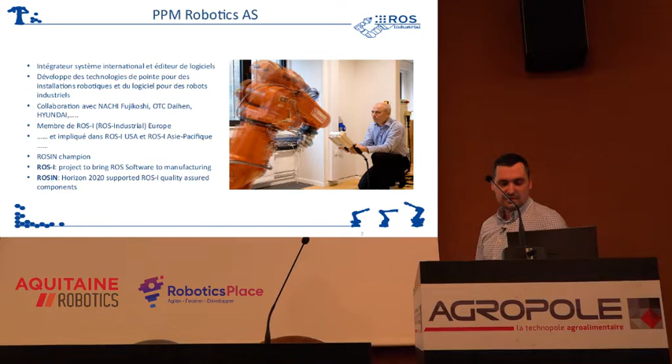About PPM Robotics AS, we are located in Trondheim, almost middle of Norway and next to hell. We are always trying to tell we are close to the hell. Yeah, basically that's the name of the airport. And there's supposed to be this northern light, which I never saw in the 8 years I'm working in Norway. But it should be there. I'm not sure why I haven't seen it. Yeah, of course, we have partners in Narvik as well, but I don't, that is too cold for me. My Hungarian body won't survive there for long.

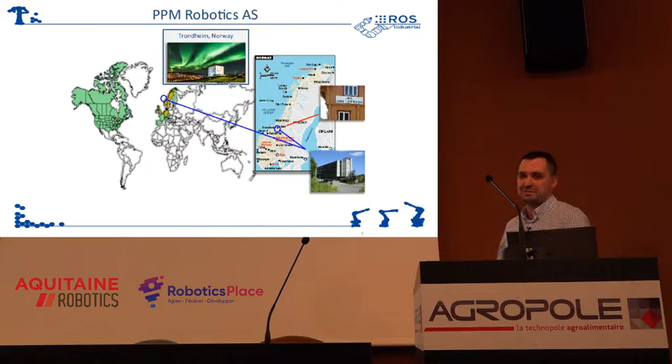What we are doing, we have industrial projects like automation systems, feasibility studies, and we have some customized devices as well. We have some products, mostly software products, not in the list.

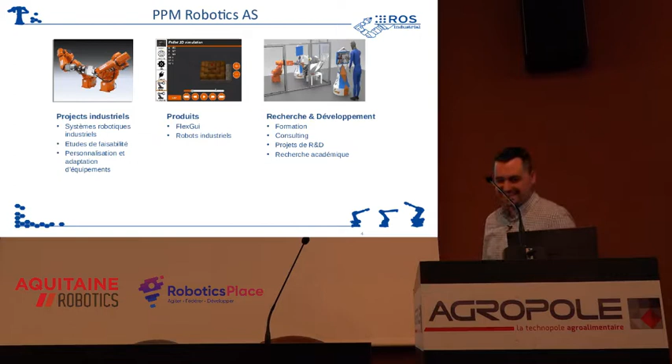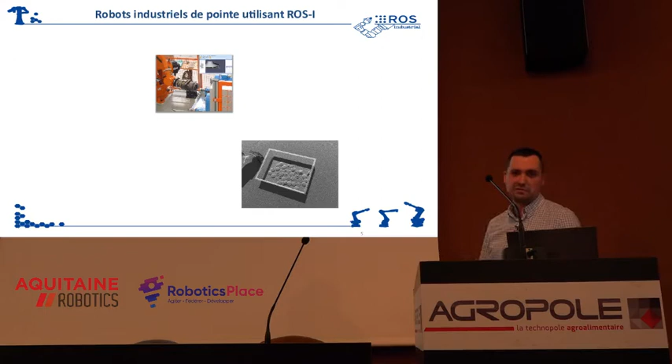I hope I will find my next slide because it's a bit... yeah, it's the default settings on the printer. I'm not sure why I can see only 2 images here, because I'm pretty sure I included much more. Why are they missing? They just disappeared. First, when we checked it, it was okay. Anyways, so here you should be able to see much more projects we made. Yeah, it's Black Friday. Yeah, basically most of our work is missing. We have many grinding projects and welding projects, robotized welding and grinding projects, some machine vision projects, and UIs we made for our customers, which you won't see in this presentation. But maybe we will send you the right one after this meeting.

So here you can see some of our projects based on ROS or using ROS. FlexGUI 2.4 is not the best example, to be honest, because that's the UI extension for Nachi robots. But we made it ROS compatible, because after 5 years or something like that, when we first met with ROS. So basically, Nachi or OTC robot can be used with ROS and not joint levels.

So we will arrive at the point when I will say we are not trusting ROS as a robot controller. It's not as reliable as the robot controller what the vendors are making, but you can access all of the variables from the robot, and I think, and we think, this is the most important thing for a robot controller, that you know all of the integers and strings from the robot. This is what we cannot use, for example, with the ABB driver or KUKA driver. I don't think it's available, only the joint level driver, so I can control the robot from MoveIt, which is not acceptable right now in the industry, I think.

We have FlexGUI 4, which should be the basic, easy to use UI for ROS. It's fully ROS compatible. You can assemble UIs quite easily, and you can program it.

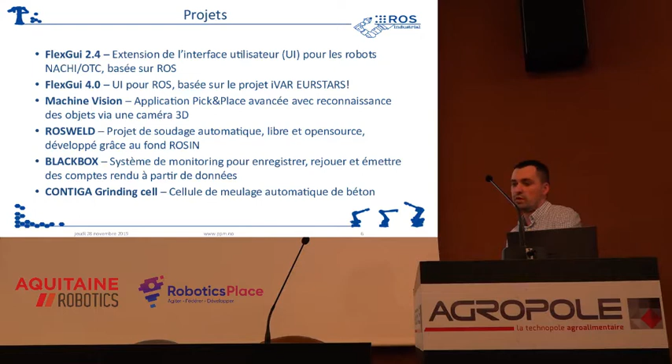And we have a Contiga grinding cell, which is not controlled with ROS, but the UI is based on FlexGUI 4, and we are communicating with ROS and transferring the variables through ROS in this project.

Oh my God, I just looked at the text and I cannot read it.

So why are we using ROS? Many of our projects start with, okay, what kind of devices should we use? And we pick ten, from four different vendors. Okay, how should they communicate?

And then, of course, many project managers say it's easy, you just connect them to each other and it will work. No, there is no magic box in the market which supports this, for free of course.

And many times we need drivers for devices, we need applications. We don't want to reinvent the wheel, and that's the most important thing. We don't want to start a project from zero and write code someone else already made. Why would we? We'd need the testing and everything from scratch, and that's just stupid.

ROS provides a lot of drivers, applications, frameworks, examples, documentation, wiki, and there is a big community behind it. If you go to answers.ros.org, you ask a question, and I'm sure that in two to three hours you will get some answers, and that's incredibly fast and really helpful in some cases.

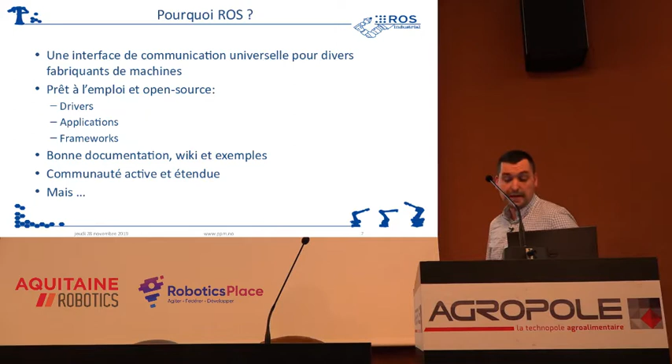But there is always a but. Where is that? Oh my God. It's totally mixed. I think that's the dark side of ROS or something like that.

So, weaknesses. I wrote dark side, it's not one hundred percent translated. Anyways, the quality of the code is not the best, I would say.

Why? Because a lot of really enthusiastic people, not amateurs of course, but who want to learn ROS, contribute some components, and we would assume it's ready to use, but it's not. It's absolutely not. A lot of university students are working with ROS, and maybe their vision of the reliability of code is not the same as the industry has right now.

Therefore, you will need a lot of development still to make an industrial-ready ROS application from these components. Of course, the base of ROS, the ROS core, ROS master, and the communication layer are extremely reliable, and we never had a problem with that. But the nodes and components we find on the internet are not at that level.

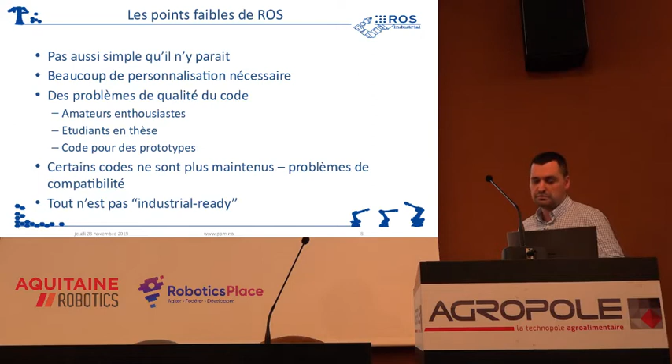And the other problem is the lack of documentation of some components. So that's why I'm saying it's really good to start a project with ROS, but you have to take into account that there will be problems. There are always problems.

Summary. I think I've already said that ROS is a really good basis for a project, but we still need some development, which is not a problem if we don't need to reinvent the wheel. But it won't be an easy job.

And you need a lot of experience in ROS and in software engineering to understand everything, and from robotics as well, of course, because these components are mostly made for robotics.

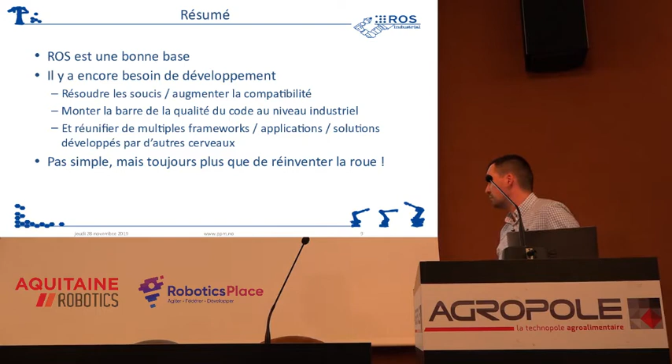FlexGUI 4, as I already mentioned, is our vision of an easy-to-use UI. It's something like a mobile UI, but it's not actually a mobile UI, because you can use it on a PC as well. This should be our UI for ROS. We use this UI in every one of our ROS projects, and even in projects where we're not using ROS, because the interface and the WebSocket protocol the ROS bridge offers is well-defined, so we can implement drivers for FlexGUI 4 in basically anything.

We are trying to provide a nice looking and easy to use UI. You have UI elements, buttons, and things like that, so you can drag and drop them onto the UI and program them in JavaScript.

Why am I showing this? Because FlexGUI 4 is open source and free, and you can find it on GitHub. So if you need a UI and don't want to reinvent the wheel, go to our GitHub page, download FlexGUI, and it will work out of the box with ROS. You can access all the topics and call services with a button press. It's quite easy, and the documentation and everything is included.

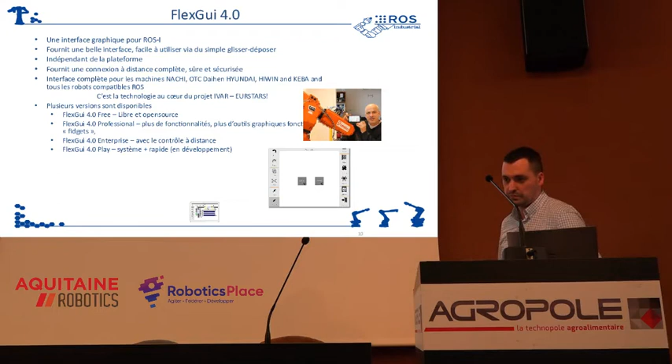In FlexGUI 4 we also have a separate interface to Nachi robots. So it's a bit easier to use FlexGUI 4 with Nachi, but it's not impossible to use it with, for example, a KUKA robot or ABB robot. You just need to implement some small interfaces, but it's JavaScript, which isn't really a hard language to learn.

FlexGUI 4 is an AngularJS application. This is a 5 or 6 year old project, that's why it's an old framework. But we are working on a new version which implements Angular 8, the latest Angular version, and we are supporting Android, Windows, and iOS as well.

So you can use FlexGUI 4 as an HMI. Remotely, you can control your cell. You don't need to buy an industrial PC or industrial tablet, it works with any modern web browser. I think this is a really good feature, and with the help of ROS, you can control your cells quite easily, and it's free.

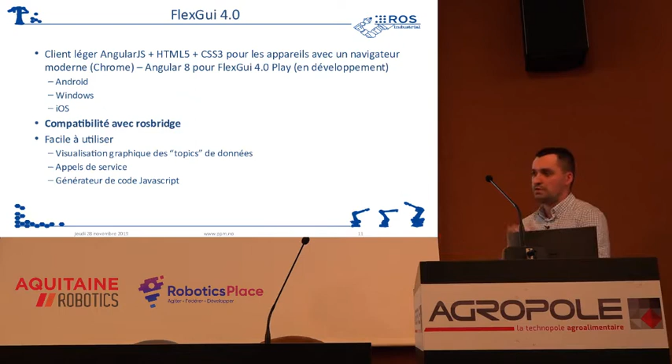It's on the website. I think this should help you in making prototypes, or even to go to the customer and show a new UI and say, hey, look, it's working out of the box. Usually they are happy about this.

And here is our, not the latest, because the latest ROS-in project is the black box, but we made this ROS-Weld project in 2018. This is a robotized welding application with some kind of machine vision. Actually it's not machine vision, because we are reading laser sensors and trying to position the robot based on the readings.

This should be an innovative ROS-based framework. It's your decision to decide if it's innovative or not, but we think it is. It uses the same UI, the FlexGUI 4 based UI. If you don't like the UI, you can just edit it, it's completely open source and documented as well. And the framework is built upon ROS components already on the market and on our previous research.

This image is taken at Rainpower AS. They are a big water turbine manufacturing company. One water turbine is at least this big from the ground, and they are welding it with robots.

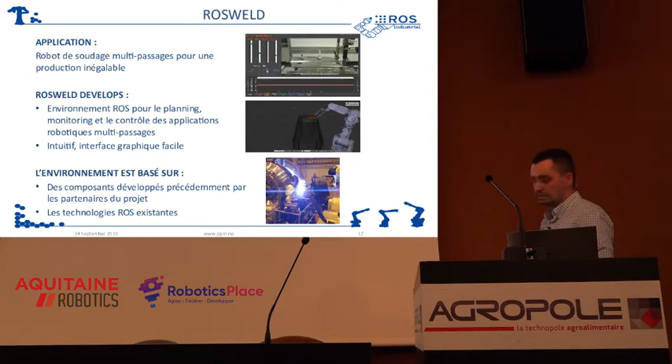All of our projects are used in production. And that's why we made this ROS-in project, ROS-Weld, to share all the knowledge in robotized welding and in ROS.

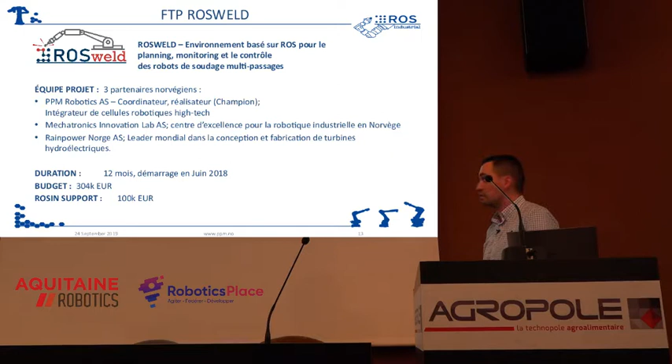So, in the project there are 3 Norwegian companies: PPM Robotics AS, who are coordinating and developing the software; Mechatronics Innovation Lab AS, who are a catapult center for industrial projects and technologies around Norway, and also want to share the knowledge of ROS, so we have many small ROS projects there, 5 small installations, both ROS based; and Rainpower AS, who are basically the manufacturer of these really big water turbines.

Now they are trying to add, I think one blade on a water turbine needs 200 welds, because the current ones are much bigger than this. And it's really hard with human welders, it takes an insane amount of time, because out of 8 hours they can work only 2 because of the working conditions.

But the robot can weld 24 hours per day, and this project helps them plan the welding itself, so how they fill up the groove, how they connect the blades to the ring.

The budget is 300k euros, and we got 100k euro support from ROS-In, which was a really big help.

The goal, mostly I already told you the goal, is to robotize the welding because of the hard environment, and the pilot case will be installed as a pilot project at Rainpower. The previous welding project, CoroWeld, which was not based in ROS but had the same principles as this project, is working at Rainpower.

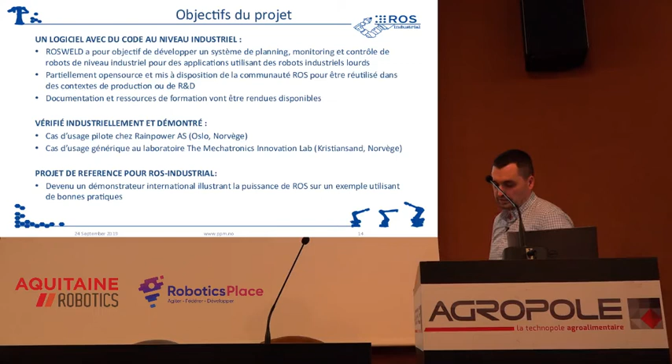These are the functions we are offering with ROS-Weld. You can plan, simulate, control, observe, and store your data with ROS-Weld, and it's totally modular. So if you don't want to use a Nachi robot, no problem, just implement the same interface to ROS and it will work. It's totally transparent, and you don't need to use, for example, laser measurements. You can work without that, with manual teaching. It's not a problem.

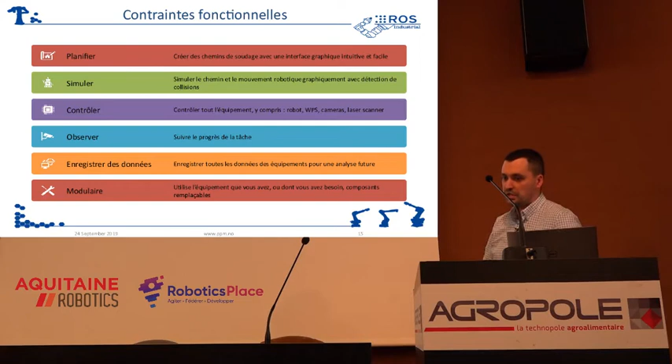I don't think this slide should be here, but anyways, our problem was in this project, and why we chose ROS.

We are using many components. As you can see, in MIL, the Mechatronics Innovation Lab, we are using this type of welding equipment, I'm not sure about the name. But in Rainpower we are using an OTC welding equipment, so different types. How should we connect both to our system? We didn't know. And they had different laser scanners, but they want the same result.

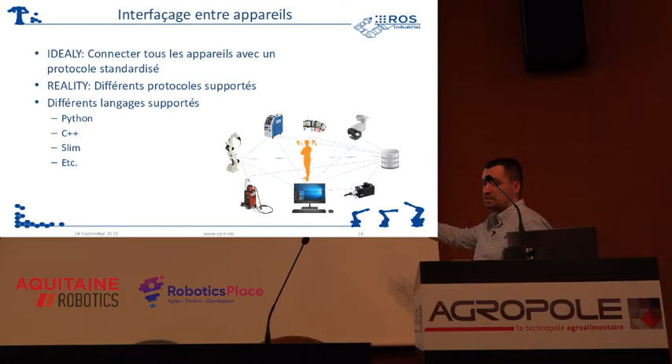They have different cameras, different welding cameras. How should we connect everything in a flexible way? So therefore we went to ROS, because it defines a really good, well-defined interface, a flexible one, and it's really easy to write drivers for ROS. I mean, everyone can do it. Of course not, but it would be really nice.

Sure. And these are the components we are offering in this project. Because of this project, we uploaded a free and open source OTC driver. It's only a base of a driver, of course, because you will need to customize it if you want. But you have everything to understand how it's working, and it offers the movements and every interface to be able to move a robot.

It's Fronius, it's a Fronius WPS, so we are offering an OTC and a Fronius WPS driver. So if you want to use them in your projects, you can download them from our website and from GitHub.

We are using MEL iLAN lasers and micro epsilon lasers. The drivers are uploaded. We are using an IP camera. This is a good example of how we changed some of the already existing drivers to a bit more usable and quality assured drivers, because this was an open source driver on ROS. We downloaded it, customized it, tested it, and uploaded it into this project.

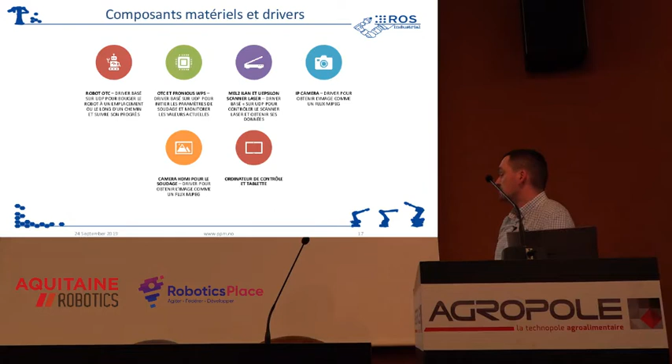And we have a welding camera, which is basically a HDMI welding camera, so it doesn't really need a special driver.

This is how we are using ROS basically. So with FlexGui4, with the UI, we are communicating through ROS bridge, and everything is connected to ROS, basically to ROS core. But when we are talking about ROS, we are referring to the communication layer.

That's the thing we are using most often, not its parts like MoveIt and RViz, because the customer doesn't care about RViz. Why would they? I mean, they don't want to use Linux at all. They are not a highly educated person who can use Linux and RViz, because they still need programming, or at least programming knowledge.

So we are connecting all of the devices with our drivers to ROS, and we are communicating with the core through ROS. Therefore, we don't need to write the communication layer. In this project, we are also using MoveIt and RViz, but not as the main UI or main components, but for the simulation.

So in this case, you can change between the real robot and simulation. You can assemble your path and weldings in a simulation environment, which is offered by RViz. You can plan the robot movement with MoveIt, but the system uses MoveIt automatically, so you don't need to know how it's built up and this kind of thing.

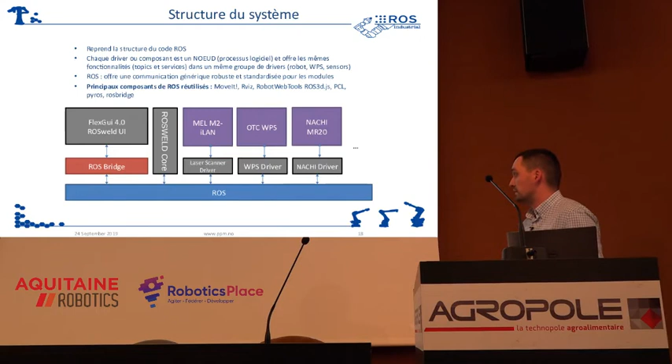We are using ROS3D, which is an open source library as well, for displaying the simulation in a web browser. PCL, the point cloud library, is for the laser scanner. PyROS is for the core, so the ROS-Weld core is in Python, and ROS bridge for some connections. Actually, we are using it not just for FlexGui4, but for some other drivers as well.

In our laboratory, this is a picture from our laboratory. Rainpower's installation is, of course, a bit different and much more complicated than just two metal pieces being welded together.

We used for this project a NACHI MR20 robot, an OTC welding equipment, the MEL M2-iLAN laser scanner, Cisco IP cameras, and a Samsung Galaxy tablet for controlling the cell. That's what makes it really flexible, FlexGui4, that you can run it on your tablet, go near the welding machine and adjust the position really precisely next to the robot.

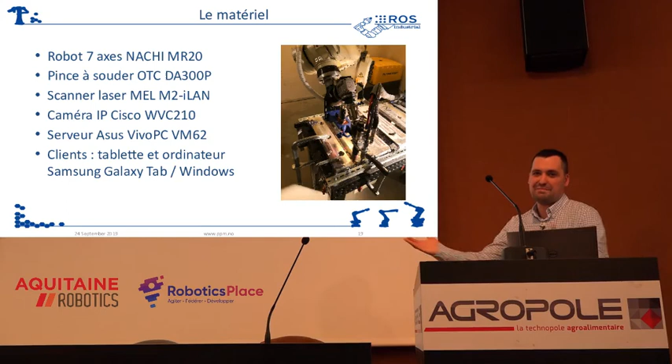Of course, sometimes it's not safe, but who cares about safeness? Even Rainpower goes next to the welding equipment because they need to.

This is our other project, Blackbox, which is another ROSIN project. It's for monitoring, and basically we are storing the data in ROS bag, and then you can define expressions. If something happens, you can get a notification that something happened in your cell, in your production, which is not in your office.

Imagine you are sitting in your office working on something else, and you get a call from your biggest customer saying, hello, my robot cell just stopped. Why? I don't know. Then you have to go there, and the production stops for 2-3 hours. That's a really big problem.

Therefore, we are developing this software to get instant notification from the robot cell and all of the variables and things flowing in the robot cell. So everything you push or publish to ROS will be in a bag file which we upload to the cloud. You can download it and investigate what was the problem.

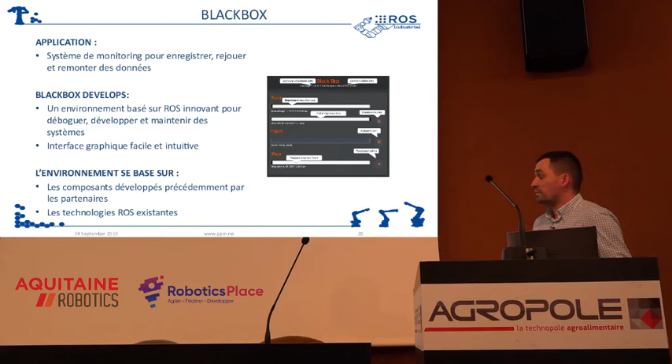This is a really important thing in the industry. It was missing, according to our research, from ROS, and of course you can buy it from Siemens for a really expensive price. I don't think it's really worth it. But this is an open source solution for this problem.

So we are using the same things, FlexGui4 as the UI, so you can control the black box from this UI. We are using ROSBag, which is really reliable. I suggest using it because you can play back your data, stop it, and check everything that happened before and after.

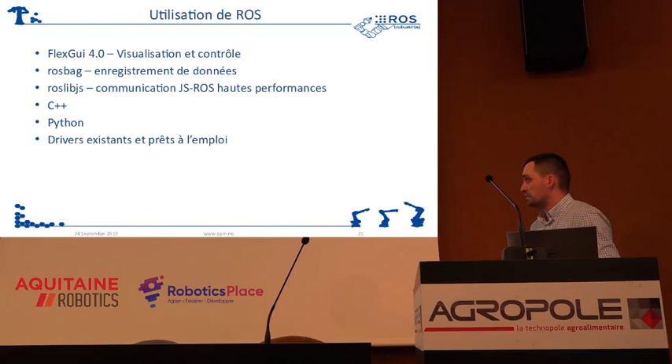It's developed in C++ and Python, and we are providing drivers for cameras, and also part of the Nachi driver will be uploaded there. It's not published yet because milestone one isn't accepted. You are working on it, I know.

This is how it's built up. There is the local system, which is an installation, maybe a pick and place installation or something else. It doesn't really matter as long as you are providing your variables to the system. We record these variables and compare them with the expressions you are defining, and if something is wrong...

...then we send an email and upload the package which you can download and investigate on your remote machine. So you don't need to go there and spend many hours figuring out what was the problem, because of course when you are there the problems are not happening.

It's like when you have problems with your car and you go to a car mechanic. What's the problem? This is the problem. I cannot see it. So this can help in these cases.

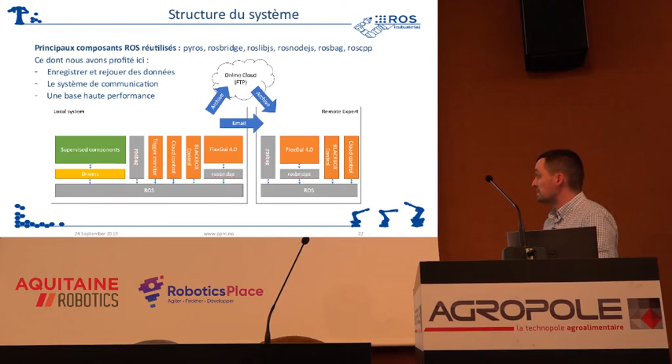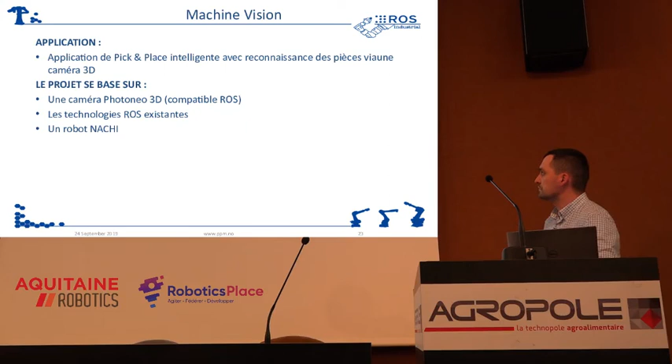Maybe this is the most interesting part: the PhotoNeo camera is sending point clouds to ROS, and with the help of OpenCV, that's the Vision OpenCV package in ROS, and the pcl_ros and transformation packages, everything is in ROS. We are calculating, basically ROS is calculating, the orientation and position of the workpieces, so we can pick them up with a robot.

This is a good example of the customization of ROS packages, because yes, they are there, but I haven't heard about the parameters connected to the vision system in my life, and we had to customize them to get a really precise image of each workpiece, to be able to determine that there is a workpiece, and another workpiece, and what their orientation is. So the challenge in this project was to find the right parameters and understand them.

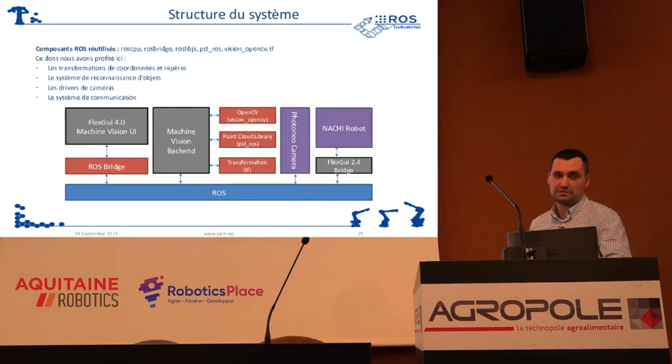And I think that's me. So this was some of our industrial experiments.